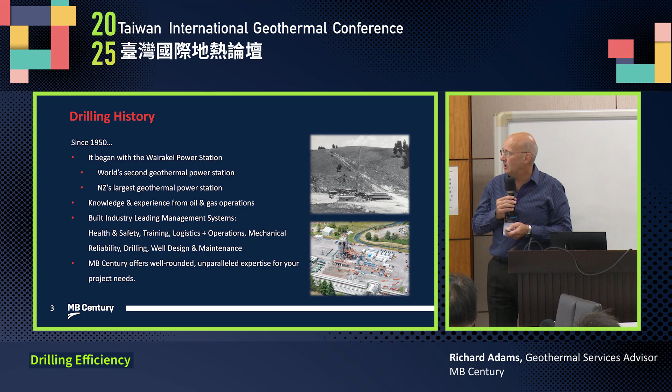So as I said, we're just going to get through this. But some of the things we're on about: honesty, up front regarding costs, right? So quality assurance, we make sure that happens, right? Prioritizing quality, we don't want to do a bad job. We want to make a successful operation.

But from our experience, we prevent pitfalls, making sure that we don't cut corners trying to find a cheaper alternative. Safety is number one for us though. Even the small things, everything is reported. It's not the blame game, it's to learn and make sure that everybody goes home safe, and that's our number one game.

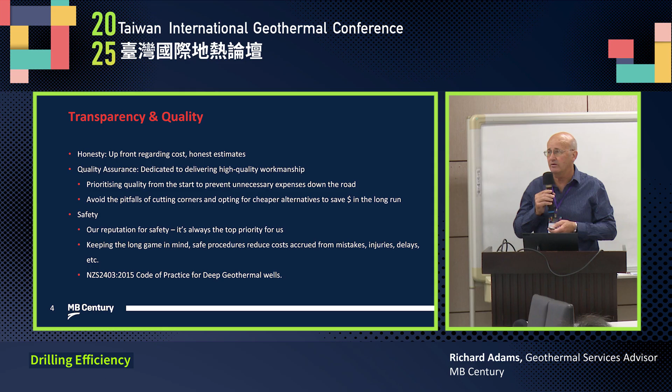So our cultural change has been dramatic in the last 5 to 10 years in what we do and how we do it, working with our client. So our reputation for safety is high on our priority list, but also that New Zealand Code of Practice of deep geothermal drilling, okay? That prevents a lot of mistakes in the whole operation, so you've got to think about that.

And we've had some results. So this is in the Philippines many years ago, one of our older rigs. It's long gone, but we have some experience there. Now we have Rig 32, and that has been looking after us quite well. And through COVID, we got through that.

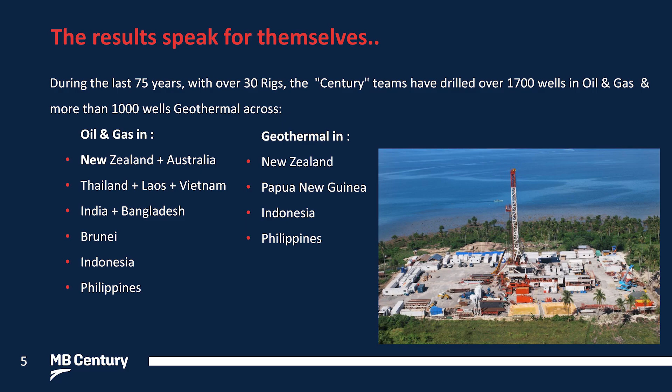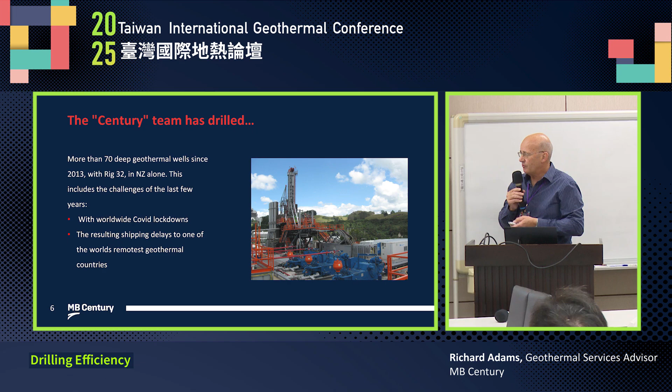We managed to keep a crew on station through the challenges that brought us. But remember, New Zealand is a long way from Italy, where the parts are made, so we have to order these things a year ahead. So it takes us quite a bit of planning and logistics behind the scenes, and we run with a very small, lean team to do it all. But you notice in the picture, 3 mud pumps. There's some other things we're going to talk about here.

Anyway, this is some of the things we do under the drilling services, and we can help you in different ways, and train people too. We've been invited to help in commissioning projects and things like that. So as I said, I'm racing through these quite quickly because I want to focus on the business end.

And of course, we can carry on with these things as well: providing advice on environmental constraints, management of drilling operations, regular reporting, and comprehensive well completion reports. That's very essential. I can go back through records to 1950 and find the original handwritten records of the first well drilled in geothermal New Zealand. Still relevant, that's the records we want to look at. We're looking for 60, 70 years of records or more.

And from that, if we want to get into that new geological area, what is the history? Who's drilled here before? Some of the paperwork I've seen from this part of the world is quite old as well, but it gives us some indication, but we've got to build on that. So each step is a learning curve.

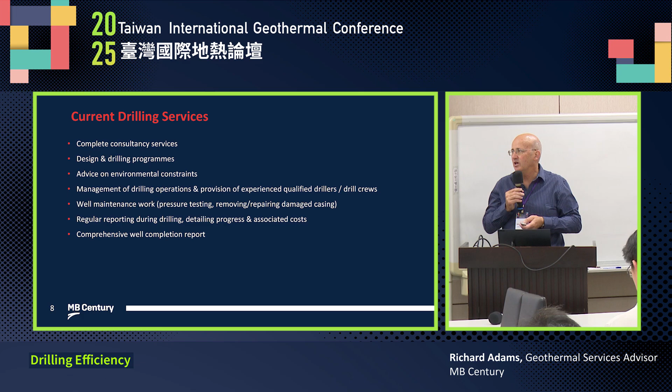Advancements. So with the rig, we've advanced from the triple, that was rig 27, and we now take it down to only, in that time frame, 1% non-productive time. Less than that is our objective, so that's where we're trying to drive to. I know in the Philippines they try to do that too, and they've learnt and are gaining on us. So it's a challenge, eh?

Anyway, we've moved from the traditional rig to the super single, and there's some things we've observed from it. Air drilling decreases the lost circulation, noise reduction - very important when you're working around local people. We've had to overcome working nearby to towns, and we built up a sound barrier wall around it to help reduce that noise. Safer operation, we don't have everybody up in the mast. Those sorts of things all make a difference to us, and our team morale is improved.

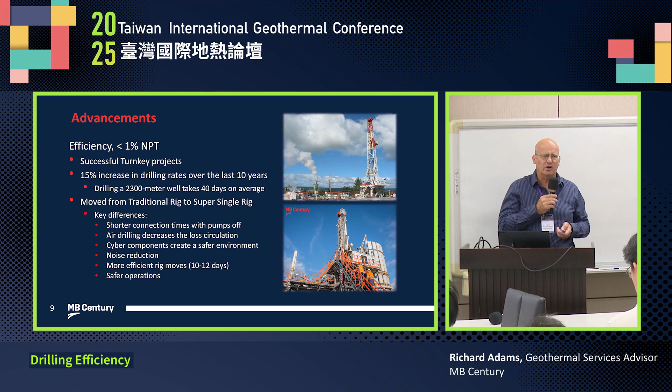Our particular rig can actually move on to 4 wells, set it up on one site, and also we can make sure that the maintenance, certification, and cycle of every 5 years you've got to go through and test and pressure test this and change that and keep all the certification up. All the drill strings checked every two wells, those sorts of things. Everything's numbered and corrected. Our asset management system is very, very impressive.

We're always learning and improving on it. We always make mistakes, but you try to minimize them. So don't get hung up on that. Learn from them.

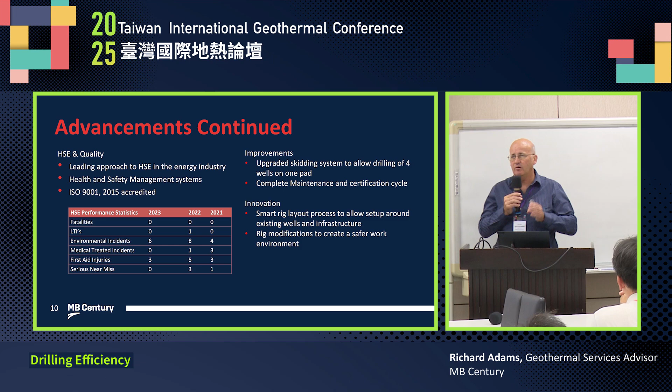Okay, so we have a bit of a few other things going on at MB Century. I said I'm just going to get through this quite quickly.

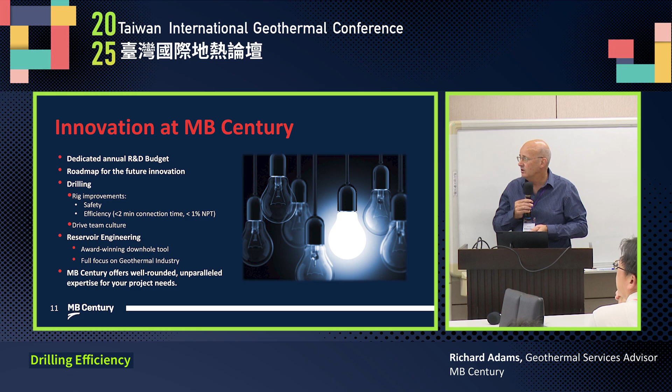And now we've also talked about moving from the one rig to the rig 32 and the 3 mud pumps, 1600 horsepower.

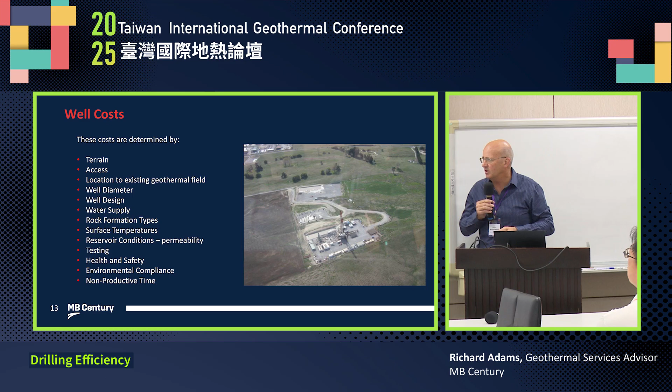But we've got 4 generators on this site. This is a big rig in a sense, but it can drill 4 kilometres technically. But we allow plenty of room around so that we can actually walk. And we're fortunate in New Zealand that we do have that luxury.

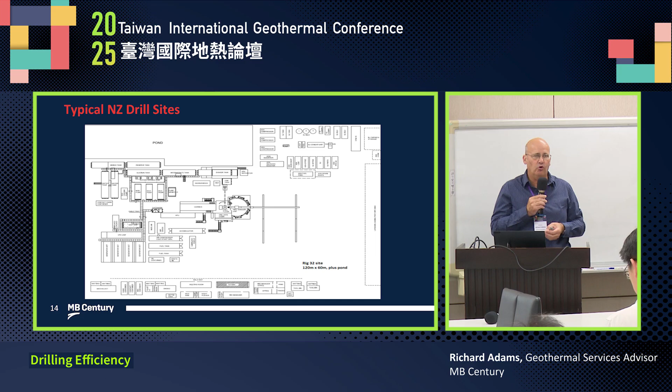So from there, we make things happen. A big pond there to take all the cuttings as well. So that's a lot of rock that's going to come out of the ground for 4 wells. But we've set up for that. All good?

During construction, we're always monitoring optimization of drilling - the weight on the bit, the ability to drill with total losses. And that really scares the oil and gas guys, that's something they're not used to, right? Got a few nodding heads. Good. But also making sure that the open hole sections are deep enough to achieve the casing pressure.

So don't get too cocky and drill ahead without making sure you've got the right casing set behind you. We learned in 1960 when we nearly lost a rig down a hole because we didn't set the casing right, and we didn't have a backup plan for the pump failure. By the time we got there the steam was coming up the hole and we lost it, and that hole lasted for over 12 years. It blew a crater 70 meters in diameter, 25 meters deep, and roared away as a natural geyser for over 12 years, and you could see the steam in the air from 120 kilometers away.

We don't want that to happen in Taiwan. So think about it, guys - start planning backup plan on backup plan. Water on water. Tools, equipment, pumps - you don't want a failure. And especially since you're going to be in remote locations, please plan accordingly.

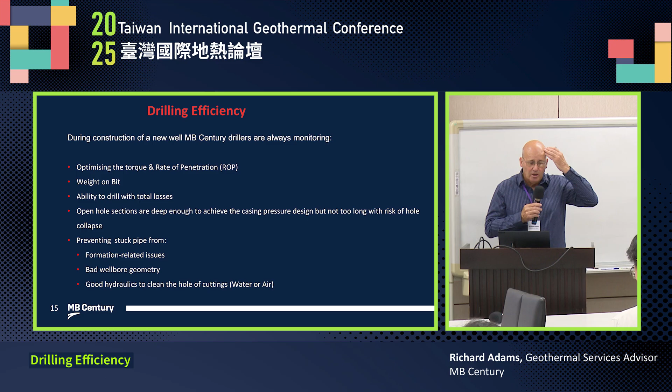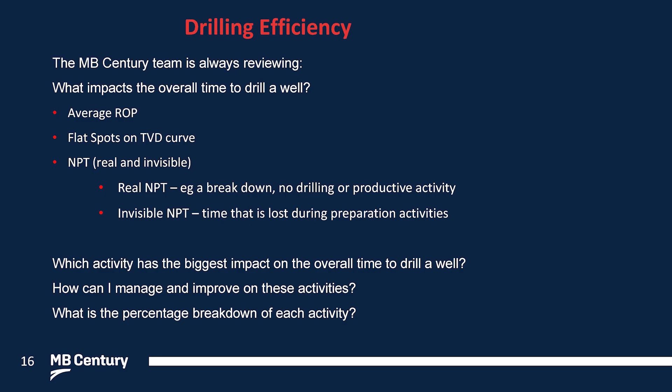Anyway, we want to prevent stuck pipe. Why? No answers? Come on, I thought there was a drilling team in here. Yeah, drilling pipe stuck is not good. That's caused by formation issues, etc., bad well bore geometry, or good hydraulics to clean the well of cuttings using either air or water - that's essential, so you want to make sure.

So there's times where we're drilling with total losses going down the well, and we keep pushing ahead. It's nerve-wracking for an oil and gas guy. Yeah, exactly - so that's what you just got to keep going through.

Thank you for answering, appreciate it. Obviously we're reviewing what takes the time - average rate of penetration, flat spots, non-productive time. From breakdown, our object is no code 8, which is our plan in our log system. That's when the client doesn't pay us - so we work on a day rate. From that, there's a whole set of codes, and the client pays accordingly from those codes.

Now, if we have a breakdown for more than half an hour, it's on us. The client - there's a bit of wiggle room in the middle there. So the contract negotiation needs to be worked through on what's most efficient for the client and ourselves. Obviously we want to do the best job, we want to be efficient, and we want to get to the next well, but do it correctly and safely.

So we need to look at what is the activity that's costing us big time - how can we improve that? Let's have a look at this one. This is how we've broken down some of our jobs, and tripping is the second biggest one - yeah, 15.8%.

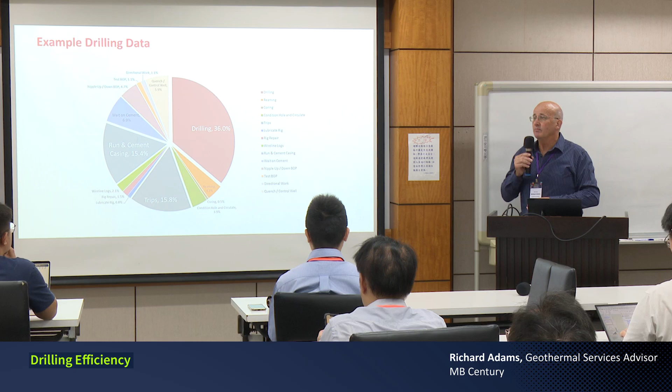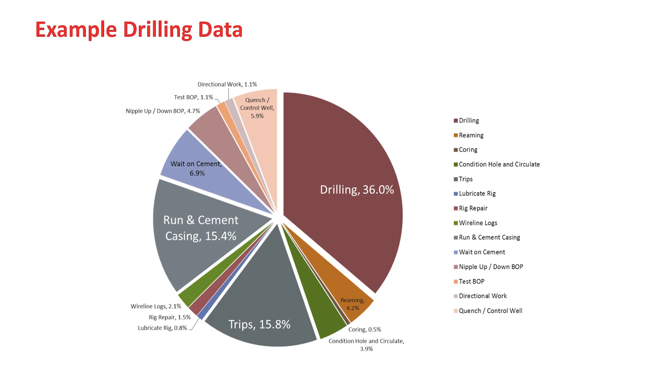We're going to get to that. So in New Zealand, I'll answer the question - we changed from a tricone to PDC bits, specially designed for the rock formations we're encountering in New Zealand. Our client, who is supplying the bits, brought in somebody from the manufacturer, hired them to work in New Zealand and get those bits manufactured correctly for the rock formation. So we're pushing 300 meters on a bit, 500 meters on a bit, or more.

This particular record here is actually from an older job, but that's why we're getting 40 days and finished a well 2,300 meters deep. I can show you on the phone - no, that's fine, I'm just saying the last well we just completed was 2,031 meters, 37 days. And our rig shifts are approximately 12 days.

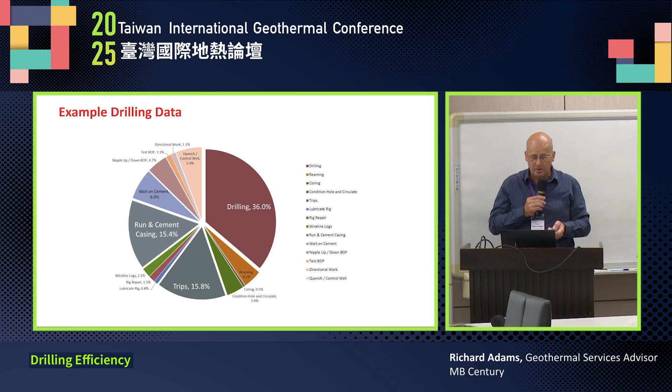I'll show you a picture in a second. So there's some opportunities, how we break it down and why. This is how we're trying to get that efficiency, and like our friend here says, there's ways and means of doing it. Let's get efficiency - this comes down to a bit of planning. I've just looked at it a bit differently, at where the bigger costs of time are.

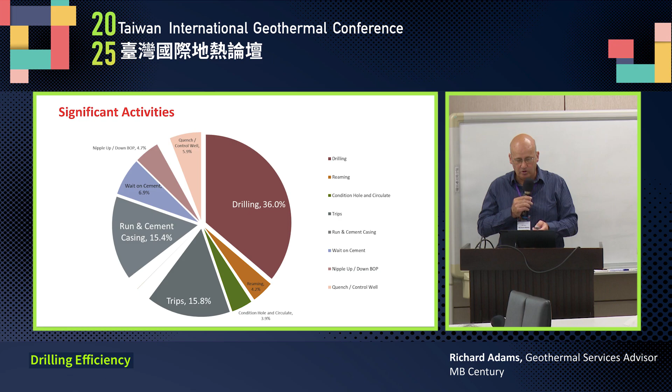All good? Okay, so now look at that - tripping takes 7.1 days. Let's look at those figures again. I've been talking to people up here using tricone bits, and they're spending all this time in and out of the hole to chase a bit. Oh, that's the cheapest bit - no, no, hang on, 7.1 days, look at that. That's quite a bit of your efficiency and your morale of your troops - in, out of the hole for a bit that hasn't done 50 metres, 100 metres, right?

I don't know what your figures are, but I'm just being very broad-minded here so guys think about things. There's a bigger picture, and get your accountants and your financial people looking at this. They're the guys that pay for those bits and your time, but they're also paying for wages just to sit there and trip pipe.

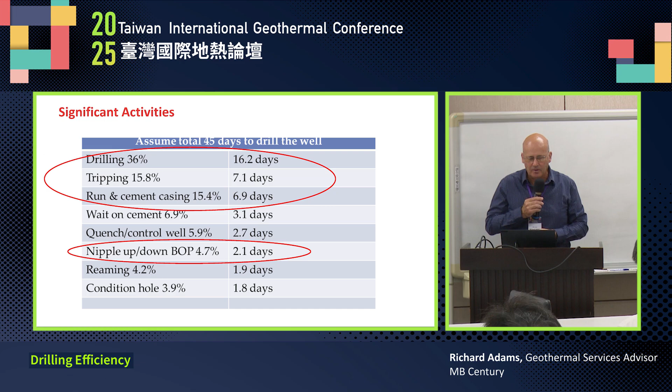Okay, there's some of the differences. So the tricone, we only use a big diameter tricone for the first 150, 200 metres, if we're lucky, because they don't make that sort of bit on the other side. But we're putting in 10 3/4 liners, perforated liner. So the production casing is 13 3/8 and 10 3/4. So we're drilling a 12-inch hole. That's our predominant piece. So obviously that bit selection is quite important.

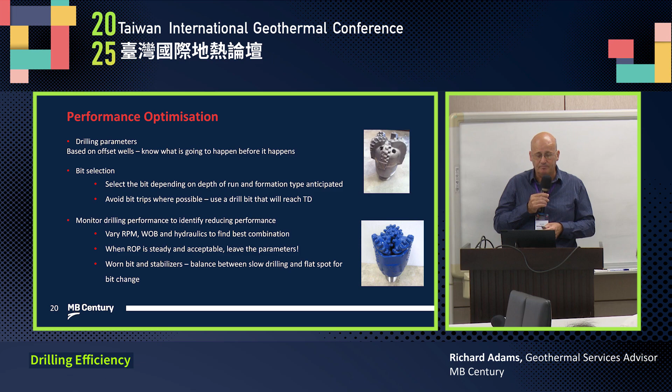Obviously looking at our RPM, weight on bit, hydraulics to find the best combination to be most effective in the job. And then checking our worn bit and stabilizers, making sure, and we're going to look at that in a second.

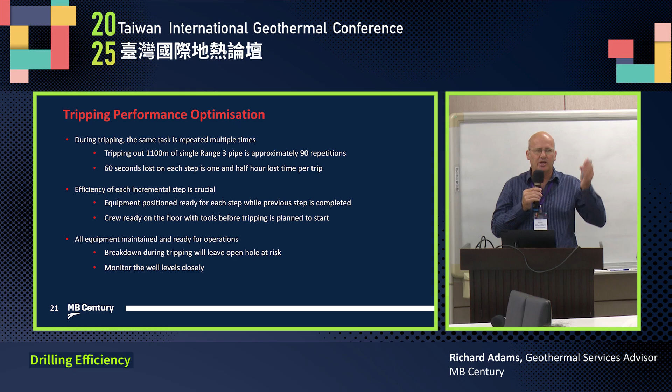During tripping, look at this, guys. Same task repeated multiple times. But people question why we went from a triple to the automated drill pipe rig. We actually did studies on it, and we ended up that we were actually slightly ahead using the computerized Drillmec type automated rig to actually trip out, because the pipe is actually 14 metres long compared to the 10 metre or just shorter of the other one. You're pulling out a triple, you're pulling out 30 metres, but one 14 metre length.

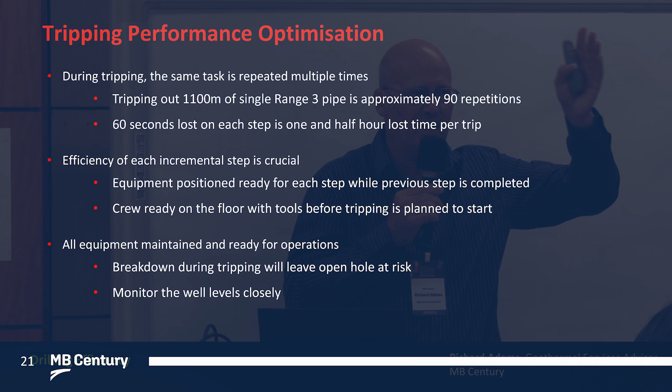It all actually worked, but we had the safety factor. We didn't have anybody up in the mast, slipping and sliding during 2 o'clock in the morning in the rain, storms coming in. Those things have to be thought about. So this is why we went down this line, and our client helped us to drive this.

Yeah, so that did make a big difference to us. And using the right S-grade drill pipe as well. But 60 seconds is a loss of an hour and a half.

Now, that's something to be thought about, because as we looked at it, 7.1 days is taken up just in tripping time in this particular example. How can we improve that? This is why I'm trying to challenge your thinking, to show you that there's ways and means of looking outside the box.

And I want you to challenge yourselves and your management or wherever to make sure that you do better. But then we think about the equipment position ready to go. The next step, crew ready to go, all planning, okay? All equipment maintained. Breakdown during tripping, obviously we'll leave the open hole, right?

We don't want that, so we make sure we look after everything correctly, maintain it. Scheduled oil services and maintenance on the plant is all done at the appropriate time to make efficiency, so that we don't waste time during drilling, because we don't want to leave an open hole situation. We don't want that, okay?

But here, looking at this, obviously we are analysing the flat spots, and that's when we do some of the other things that we need to do to plan the next steps of the well. And this is where I'm challenging your thinking.

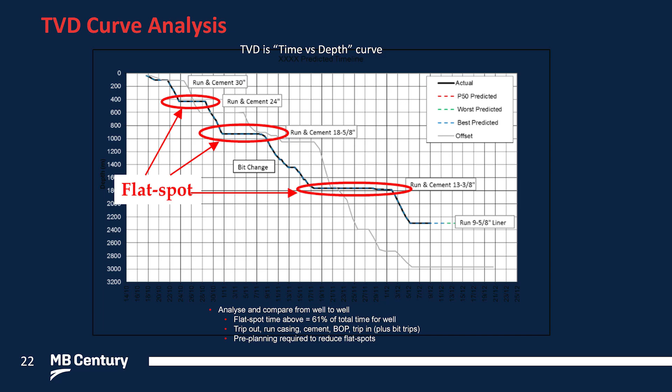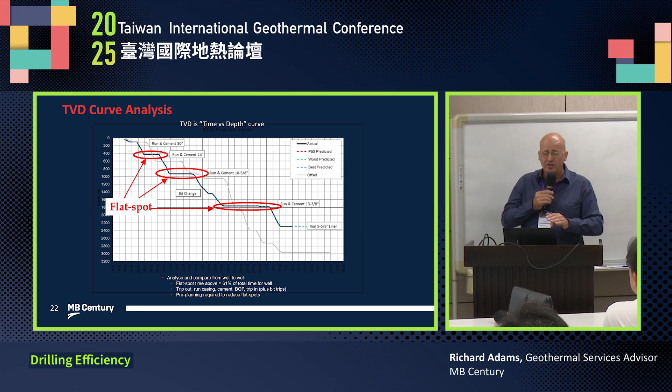In this particular case, we ran a 9 5/8 liner. But then, how many bit changes? There's only a few on that list, but it may not actually reflect truly what happened. But it just gives you an indication of what you can do.

Casing performance optimization. Yep, getting it all ready. I've seen some pictures up here and it didn't have a catwalk on there, so we can't load all this pipe in front of you easily. To get things prepared, getting everything organised up in front of you.

And then preparing the casing well run, because that takes time. And that's a dangerous operation. We've had accidents where things have slipped and not locked, or something's been put upside down, the pin wasn't put in. So everybody's got to watch each other's backs. It's not a blame game, it's making sure everybody goes home safe.